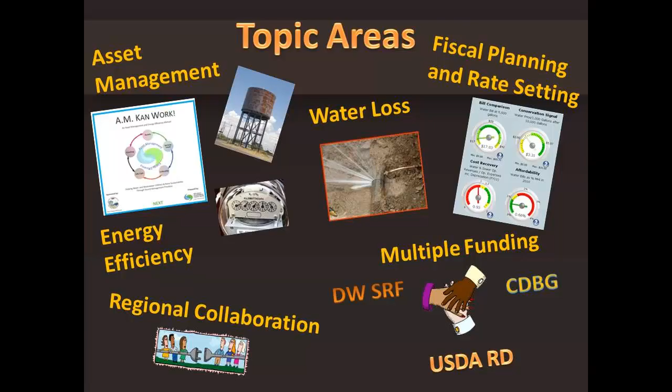Today's webinar is part of the Strategic Water Loss Reduction series of webinars. We had 3 in this series, and the first webinar was focused on understanding the problem. The second webinar focused on strategies to address real water losses, and this third webinar will focus on strategically applying water loss reduction strategies. Essentially, we will be talking about how you make decisions regarding which strategies to apply and how to apply them. Each webinar was designed to be a standalone webinar, and if you missed any of them and you wish to listen to one you missed, you can access the previous webinars online.

You can access these at efcnetwork.org. You can also access other webinars besides just the water loss ones. We've got all the other webinars archived as well, and you can access any of those on our website and listen to any of the other topics you would like to listen to.

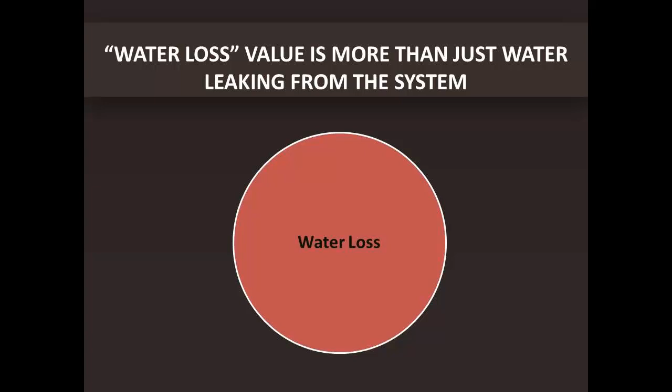So with that, we're going to start with a quick review. This equation probably looks familiar to those of you who have done any water loss reduction in the past, and you'll see an equation that says water produced minus water sold equals water loss. But we need to remember that water loss in that equation is more than just water that's leaking from the system. It's really all of these things that you see on screen.

Anything from water that you use within your town that's authorized but unbilled, to illegal water use, people who are stealing from your system, to water that the utility uses for flushing or other purposes, to the data handling and errors that may occur there, inaccurate meters, and then finally the lost water, which is what people have equated in the past. They've equated that number with just the water loss part, when it's really all 6 of these things.

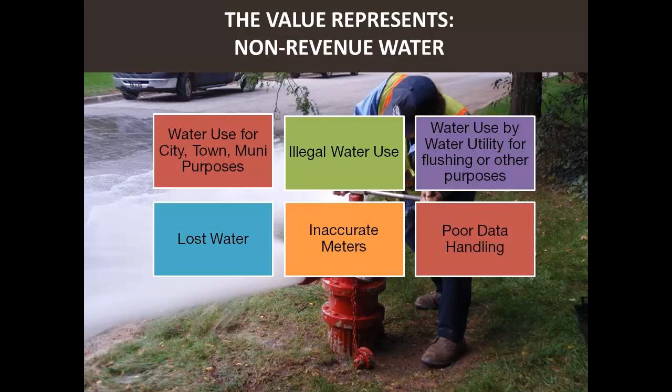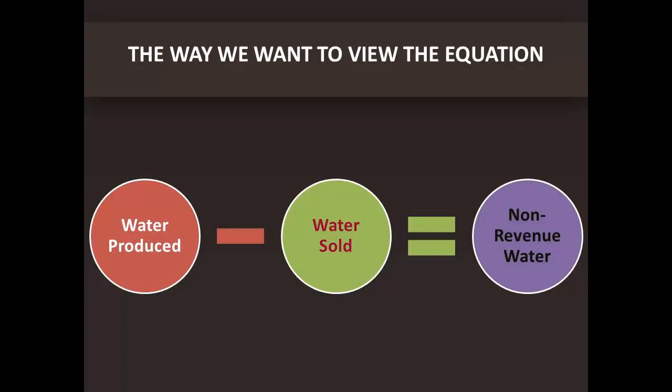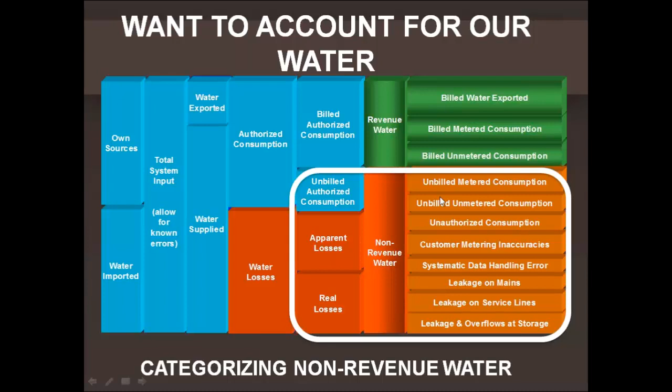So we really want to view the equation this way, where water produced minus water sold is non-revenue water. It's water that we do not get any money for. So the way we categorize that is we do a water balance or a water audit, and AWWA has probably one of the best ways of doing this, and you can go online and use their water audit software for free. What we're interested in with the non-revenue part is looking at what are the water quantities that occur in each of these categories.

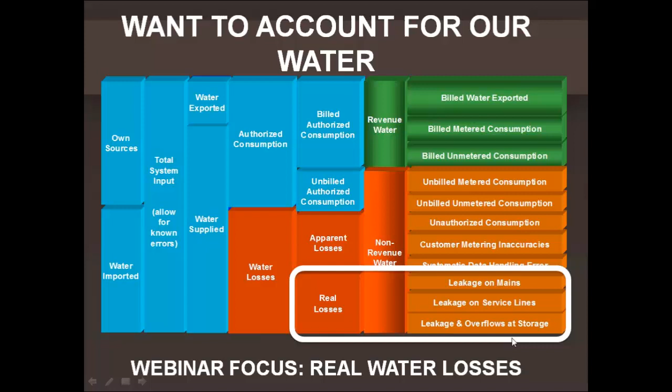And then specifically when we're dealing with real water loss, we're only dealing with this part of the balance. So you can see it's just one portion of the balance, and we want to see what our water loss is compared to the other categories. So before we start, we like to do a water balance and figure out what is non-revenue and what is water loss from our system.

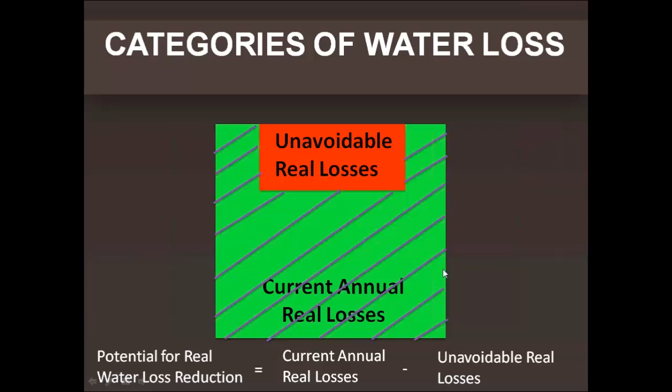Then there's another part of our water loss to think about, and that's what is economic for us to do—this is a different level. We know we have the potential to reduce all of this green area, the difference between green and red, but it may not be economical to go any further than this yellow boundary.

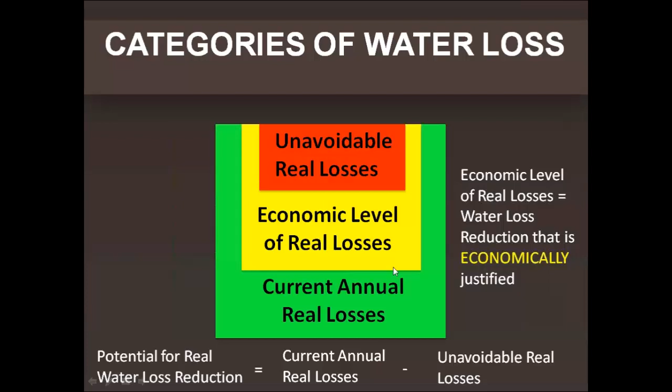What's economic is very system specific. You might have a system where it costs a lot of money to produce the water—maybe expensive treatment, or the resource is very scarce, so the cost to produce water is quite high. Perhaps that system doesn't have pipe buried very deep, or it's even on dirt streets, so it doesn't cost much to implement the strategies. In that case, the economic level of real losses may be quite high, maybe close to the current annual real losses. So in this system, it would be economic to address quite a bit of their losses.

Another system may have very inexpensive water—maybe they don't have to do much treatment, or maybe they have very little equipment, so it's expensive to go employ water loss reduction strategies. In that case, the economic level may not be that different from the unavoidable real losses.

So it's important to keep in mind that some of our losses, at a given pressure, are just not going to be removed, and there's a difference between all the water that potentially could be saved and the water that we feel is economic to reduce.

We can also add in non-economic factors. If we really have a scarce resource, we might want to go way beyond what's economical for us to do, but we just need to recognize that we're choosing to go beyond that level for other reasons.

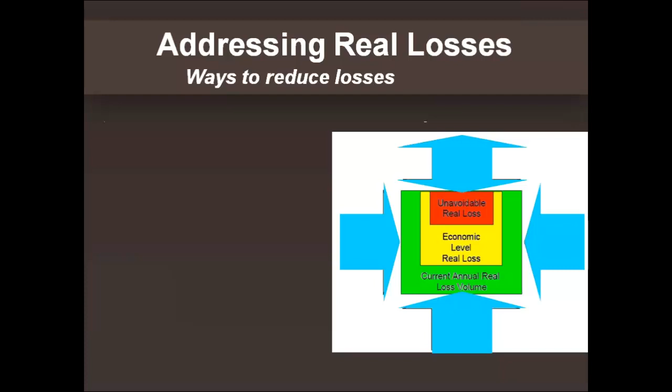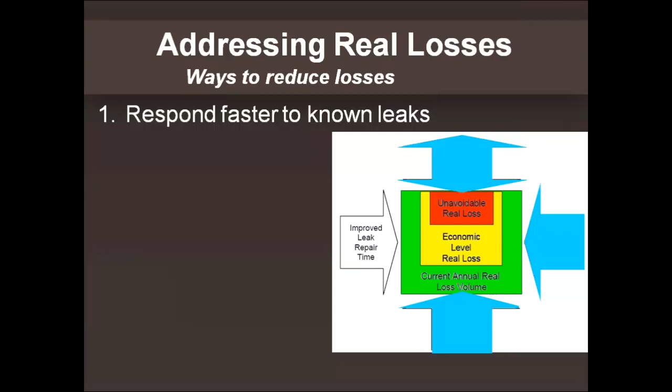When we go about addressing real losses, there are four major strategies we can employ, which we also talked about in webinar 2. One way is to respond faster to known leaks—a leak that's been found, either through leak detection or because it's visibly leaking on the ground. Getting to the leak faster saves money, time, and water by getting it repaired right away. Another strategy is asset management, which we'll explain. A third strategy is pressure management, or reducing pressure. And our fourth strategy is finding hidden leaks—proactively looking for leaks that are not visible to us.

You'll notice there are three arrows pointing in towards the green box. That signifies that any of those techniques can reduce the size of this green box. The pressure management arrow goes both directions, because pressure is the one area that can go either way—if you reduce pressure, you reduce your losses, but if you increase pressure, that will increase your losses. So pressure actually has both effects on the system.

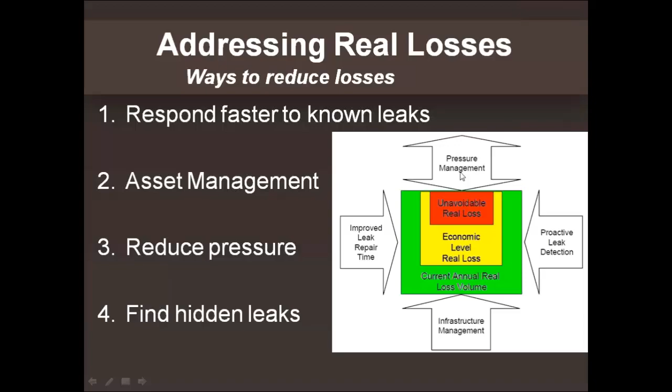Now we need to strategically deploy these four approaches, and we need to strategically decide which of the four to do, and then within each of the four we need to decide how to strategically do them. So we really want to think long and hard about what it is we're trying to accomplish and how we're going to do it.

We want to make sure that whatever approach we use matches the specific issues of the system. This goes back to the AWWA water audit or whatever audit process you use. You want to make sure that if you're taking on a particular water loss strategy, it actually matches the issues you're having in your system. If all the real water loss is related to overflows at a storage tank, then developing a program focused on hidden leaks isn't going to address it—you need to address the storage tank. Or if there are more losses related to inaccurate meters than real water losses, that's also going to be a problem.

You also want to make sure that it matches the capability and equipment resources of the system. If you don't have the equipment to look for leaks, that can be difficult. If you don't have the equipment to repair leaks, that can be a real problem. You want to make sure the quantity of funding available for water loss reduction is known, since that's going to impact what can be done. You want to know that amount before you start picking strategies, or if it's flexible, know what you need to show to justify more money for your program.

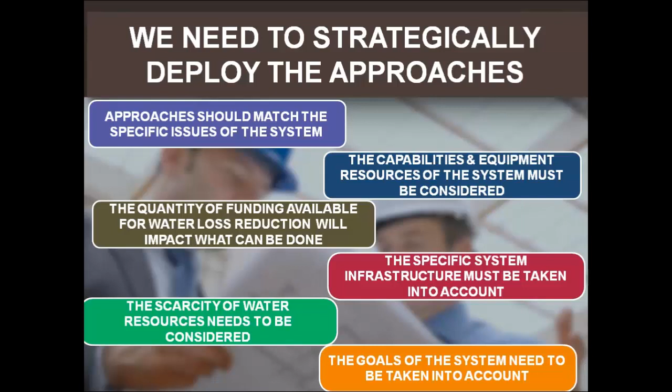You also have to take your specific infrastructure into account, so you know what technologies and techniques will match the type of infrastructure you have. You need to think about the scarcity of your water resources—if you have a very scarce resource, you may want to go much further in water loss reduction than if your resource is prevalent and you don't really have a problem with it. And finally, the goals of the system need to be taken into account, so your strategies match what you're trying to achieve. We'll talk a little later about goals and goal setting.

Something you want to do when you first start the process is gather data to assess the nature of your problem. We want the results of our water audit so we can tell what portion of that non-revenue water is related to real water leaving the system. We also want to think about how many breaks we repair each year—where are those breaks occurring, and what type of breaks are they? Are they breaks from degradation?

Are they breaks from poor construction techniques or poor materials that were originally put in? Are they breaks related to a construction contractor hitting the pipe, which is very different from a break caused by corrosion or something else? You want to think about what kind of breaks you have, and then what pipe type and size they're on. Is it PVC pipe that's 8 inches? Is it cast iron pipe that's 6 inches? Is it steel pipe that's 4 or 6 inches? What is it that's causing your problem?

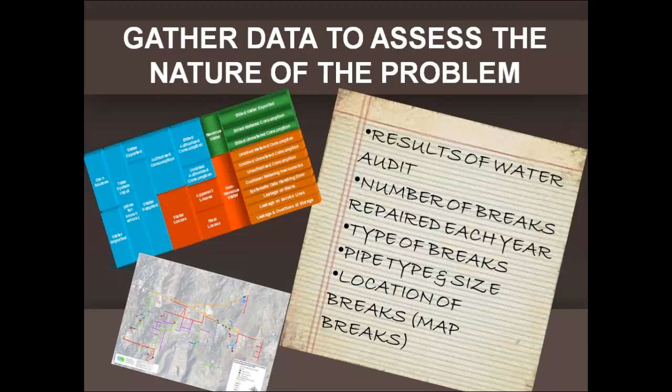Oftentimes you'll see a particular size or type that's causing the problem, or a particular location. If you map the location of breaks, similar to the map at the bottom of the screen here, you can start to get a handle on what's actually happening in your system and look at whether there's a certain area of the system having a problem.

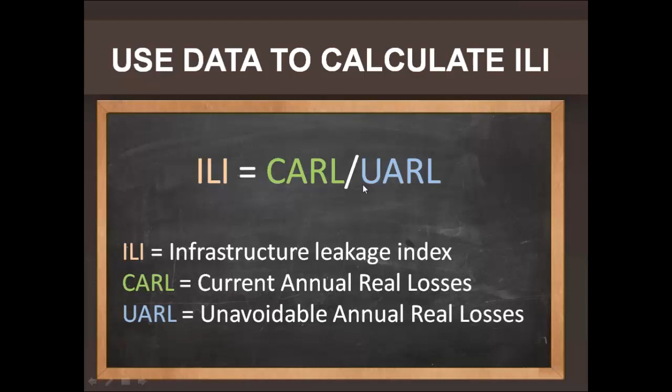Another thing you can do is a calculation, and this would be done for you if you use the AWWA water audit method. What you do is divide the current annual real losses by the unavoidable real losses to find out how leaky your system is.

Depending on the number you get, if you get a number of 1, it means all of your losses are background losses, and the only way to address that is by reducing pressure. None of the other methods will really get at that particular type of water loss. So in this case, you may not be able to do much of anything if your levels are that low, other than a pressure reduction strategy.

If your ILI is 2 to 4, there are potentials for improvements, and you have to think about which methods or method will be the most cost-effective way to do reductions.

If you get up to 4 to 8, you have very poor leakage control, and water loss reduction is going to be very cost-effective and necessary because you have quite a bit of leakage in your system.

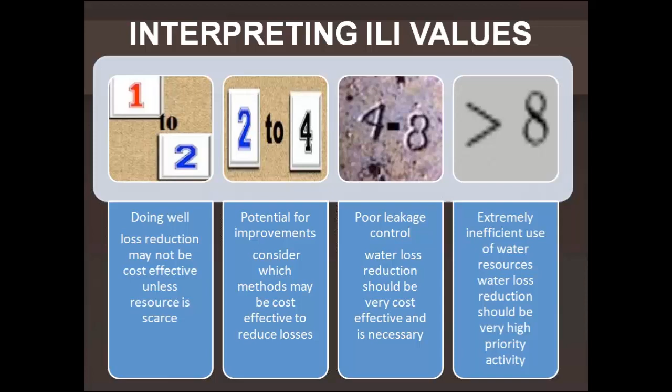If you get over 8 with your ILI, that's an extremely inefficient use of your water resources, and this means water loss reduction should be a very high priority activity because you're having a lot of issues with leaks from your system. So again, it helps you get some idea of how bad things are at your system and what you might want to do about it.

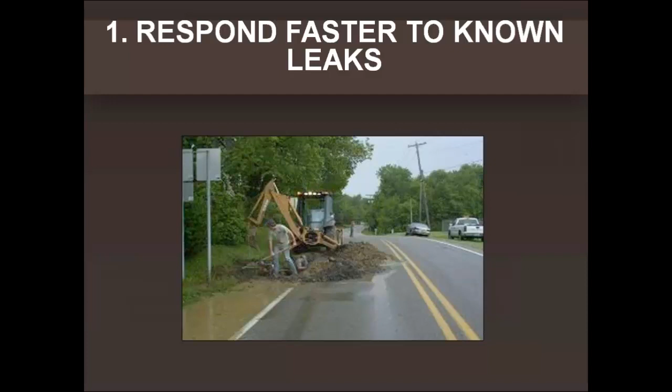Now we're going to go through each of the 4 different types of strategies and talk a little bit about what goes into employing any of these strategies.

So if you're going to try to fix your breaks faster, one of the things you need to do is collect some data to help make your case that it could be cost-effective to fix breaks sooner.

Think about what it would take to fix breaks twice as fast as we do now. If it takes a day to get out and respond, what if we did it in half a day? Or if it takes 2 or 3 days, what if we did it in 1 day? So pick a number on how much faster you would like to respond to breaks and fix them, or if twice as fast doesn't work, how about a third as fast?

If you watched webinar 2, you'll recall that when we looked at cutting the time of a leak in half, you could save quite a bit of water if you can do that. So if you're going to do this, you'll have to ask what resources you would require in order to fix breaks twice as fast.

Would I need additional personnel? Would I need additional equipment, like more backhoes, trucks, or shovels? Or what is it that I might need if I was going to try to fix breaks faster? Would I need additional spare parts? So you gather up all the things you think you would need in order to fix breaks faster, and then you start to prepare a cost-benefit analysis.

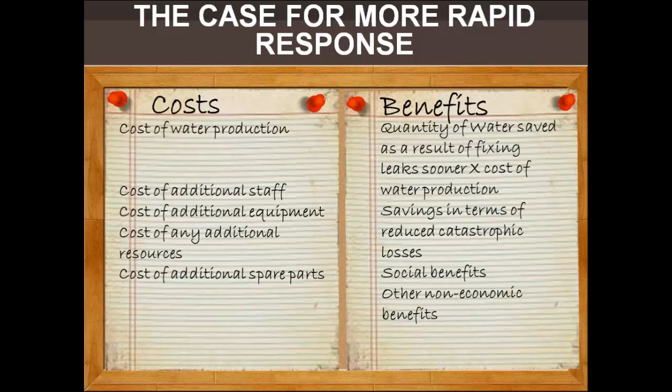What's the cost of water production, which actually shows up on the benefit side, which is why it's separated out? What does it cost you to produce a gallon of water, or 1,000 gallons of water? Then what are the costs of the extra things you would need? So you assess the staff, the equipment, the resources, etc. that you would need to fix breaks faster.

You need to add up the cost of all those things and then put that against the benefit. The biggest benefit to doing it faster is the quantity of water you're going to save as a result of fixing the leak sooner. So you take that amount of water and multiply it by the cost of water production on a per 1,000 gallon basis, or whatever you want to do there. Then you look at whether there would be any other savings, maybe from reducing catastrophic losses by getting out a bit sooner.

So waiting a long time means that in some cases you have sinkholes develop or major pipes collapse or a street caves in. If you're able to get out faster, you might prevent that kind of thing, so you could also factor in the benefit of that.

And then are there any social benefits to fixing the breaks sooner? Benefits to your customers, less inconvenience, that type of thing. That might be a non-economic benefit, and there may be other non-economic benefits you want to factor in there.

You can either turn those into economic benefits by saying every hour a customer is inconvenienced is so much money, or every hour less that they're inconvenienced, or you can leave them as non-economic benefits and just factor it in qualitatively.

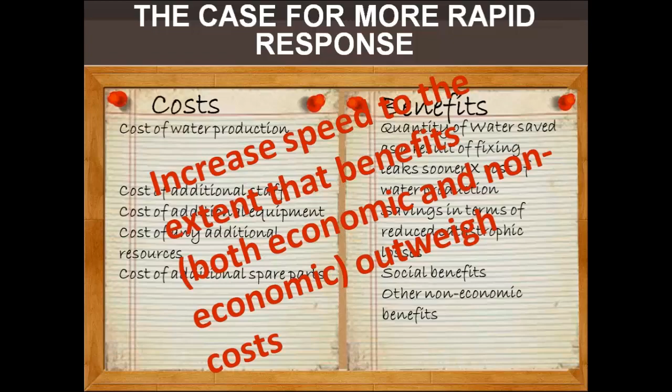Anytime it would cost you less to increase the response to known breaks than the benefits you'll achieve, it is economic for you to go forward and increase the speed. So you can make this case to your decision makers, your managers, and say, as long as it's economic for us to do so, we certainly want to do it.

If it's not economic right off the bat, we might want to put our non-economic benefits in there and see if that might outweigh the cost of implementing a faster response time. So this is one way you can decide whether it would be worth your while to increase the speed at which you respond to known breaks.

The second strategy is asset management, and we'll focus on how asset management applies to the water loss situation here. We have quite a few webinars on asset management on our website, so if you want to learn more general information about water loss and asset management, please see our website, efcnetwork.org, and watch some of those webinars.

There's a series of 5 that walk you through the process.

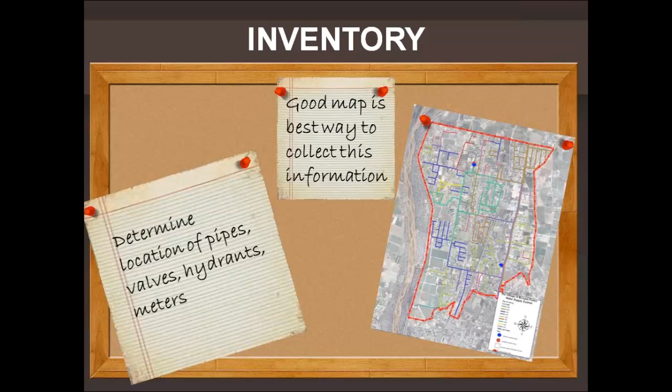But when it's related to water loss, what we start with is an inventory. Where are the pipes, the valves, the hydrants, the meters that make up our system? And the best way to collect that information is in some kind of mapping. It doesn't need to be a GIS map like the one shown on the screen. It could be anything - a hand-drawn map, a free online base map from Google Earth or MapQuest where you draw your lines on there. Just some way to collect that information into a map is the best way to inventory.

Then the second thing you want to do is establish what your water loss goals are. What is it that you're trying to achieve? Do you have a specific amount of water you want the loss to be per customer or per mile of main? You may have several different goals, or one or two goals, and you want to make sure you know the target level for each goal, because this will really help you later determine what strategies you want to employ.

Because if you know you have to get below a certain level of leakage, perhaps it isn't just an economic level - maybe you're going below that. You're going to have to employ a couple of different strategies to get there.

The next thing you want to do is evaluate the criticality of your pipes and related assets like your valves, hydrants, and meters. What we do to evaluate criticality is ask: what is the probability of failure of that asset? How likely is it that asset will fail?

And then what is the consequence of that failure? If you think about your piping network, you'll have pipes that are maybe very small diameter in a residential neighborhood. Perhaps they've shown a history of leaks, so there might be a high probability of failure, but that particular pipe would probably have a very low consequence - likely to fail but wouldn't cause a bad problem.

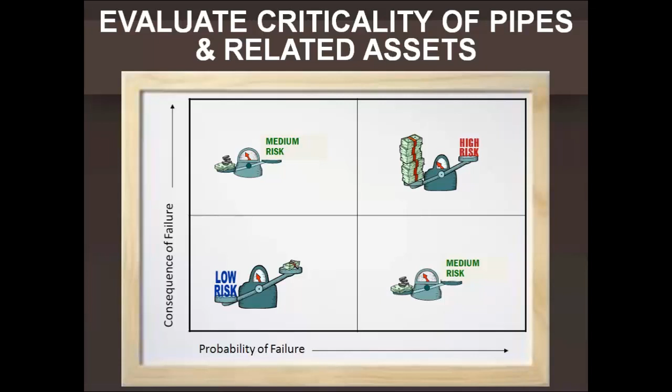When you know which box different pipes fall in, this helps you decide strategies in terms of both pipe repair and replacement, and also helps you decide which pipe to look for hidden leaks and that kind of thing. So this is a nice way to get a handle on what's going on in your system.

Knowing the criticality of the pipe helps us decide which pipe we're going to repair versus replace. When pipes are breaking in our system, we don't necessarily have to replace all of them. We can live with a higher level of breakage in a low criticality pipe than a higher criticality pipe. The ones that are higher criticality, meaning high risk and high consequence, we would probably err on the side of replacement or rehabilitation. The pipe that's lower criticality, we would probably do more repairs.

We can separate our pipe out because repair is going to be cheaper in most cases than replacement. So we can decide to spend more on the repair side when it's not a high consequence, and more on replacement when it is. There's also rehab strategies, which in pipelines would be things like lining a piece of pipe so that it stays in place, but we've rehabilitated it by giving it a nice clean liner that allows the pipe to continue to function for us.

And then finally, we need a funding strategy. What funding will we need for our pipe replacement? What level of funding would make sense for that program, whatever we're trying to do for our pipes, to cover the repairs, the rehabilitation, and replacement that we're trying to accomplish?

Could we phase our projects to fit within our budget? Maybe you want to do a whole bunch of pipeline in one year, but you just can't get the funding. If we were able to phase that over time, that might help us fit within the available funding. And then finally, is there public support for any additional funding? Sometimes if your system has a lot of breaks, there may be public support to have extra funding specifically targeting infrastructure replacement.

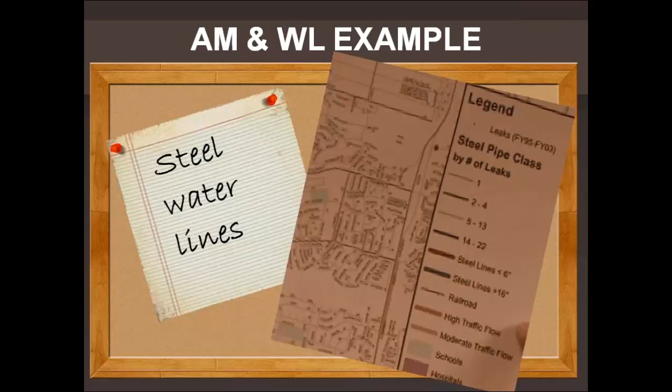A quick example of how this works in practice is the Albuquerque-Bernalillo County Water Utility Authority. They had an issue with steel pipes. We looked at data for a 15-year period and found that about 5% of the system was steel pipelines, but it was causing about 50% of the breaks on average. So from year to year, the breaks would be about half the time in steel pipelines, even though it was only 5% of the pipe they had in their system. Clearly they had a huge problem with steel pipe.

The natural response might be to just take all the steel pipe out of the ground right now. Unfortunately, it was going to be somewhere on the order of about $40 million to take all the steel pipe out of the ground at once, and that just wasn't within the level of expenditure they had. They were looking at maybe $2 to $3 million a year they could spend on small diameter steel pipe. You have to remember that when you're running a water or wastewater system, there are a lot of competing priorities. If I spend money on pipe, I can't spend it on wells or treatment or pump stations or anything else. So that was the main issue—you're always competing one thing against the other.

So the budget they had was going to be $2 to $3 million, and they had to have as big an impact as they could with that amount of money. You couldn't just start at one side of the system and work across until you've replaced all the steel, because the criticality of that steel pipeline was quite different from one piece to another. So they went through a whole analysis to determine the most risky pieces of steel pipe and address that pipe first, and they were able to have a really big impact.

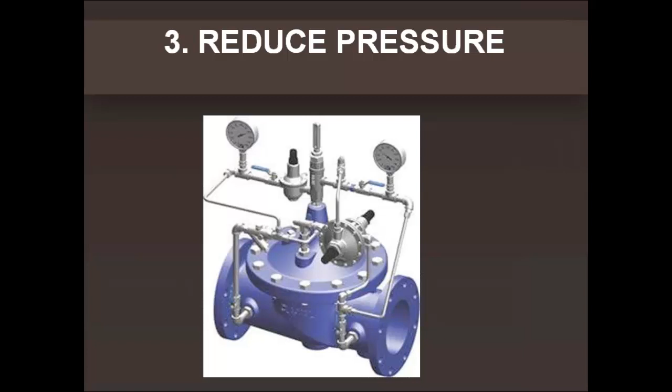Our third strategy is reducing pressure. We have two things we have to think about with reducing pressure. The first one is, do I have a problem that needs to be addressed? In other words, how bad is the background leakage in your system? And the second, is there anything I can do about it? So you first need to know if there is a problem that needs to be addressed, and then you need to know if you can actually fix it.

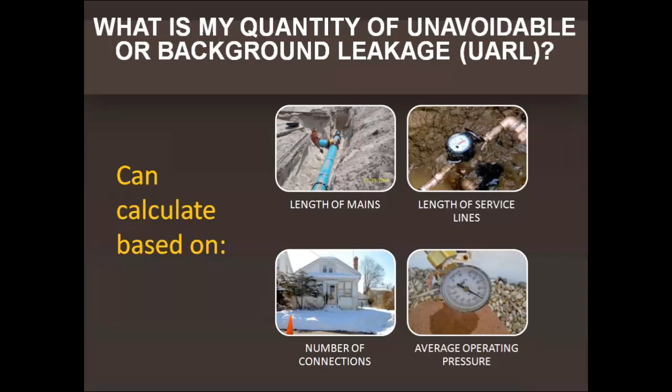You can calculate to some extent what your background leakage is, or your unavoidable losses. What you need to know is the length of your mains, the length of your service lines, the number of connections that you have, and the average operating pressure that you work at. There are several online resources that will walk you through this, and there are even some spreadsheets you can use to help calculate this.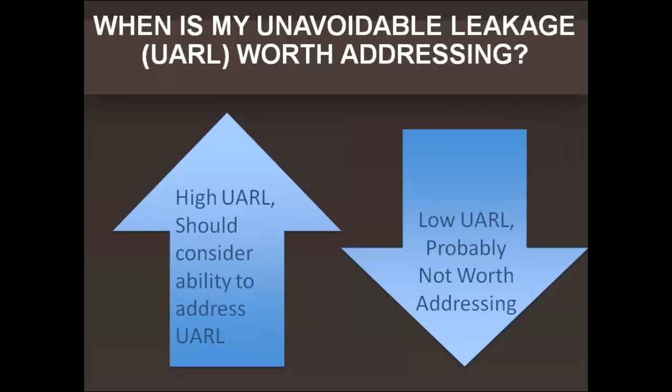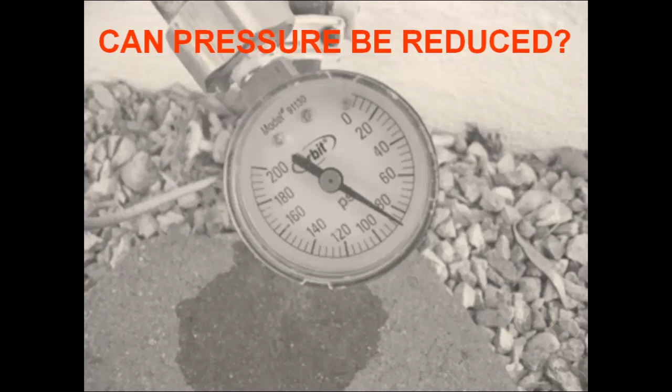So if you calculate your unavoidable real losses and they turn out to be pretty high, you may want to address that problem through pressure management. If they turn out to be pretty low, it may not be worth it for you to go through the time and expense to address it. It may be better for you to work on different real loss strategies if this is the case.

So can pressure be reduced is the second part. If we know there's an issue, suppose you have a high unavoidable real loss, the question is, can you operate the system at a different pressure to try to reduce it? Because this is really the only strategy you have, besides replacing all the pipe in your system. This is really the big strategy you have: pressure reduction.

So what you want to know is, what is your current operating pressure? What pressure do you actually operate right now? And then what pressure is required by your state regulations? Most states do have a regulatory requirement to meet, say, 20, 25, or 30 psi. They're trying to protect the public, because you don't want to operate your pipes at too low of a pressure, or you might start sucking things into the pipe, which we don't want. We want water to be pressurized so that nothing comes in, it just flows out.

And then we want to know, what pressure would our customers accept? For example, maybe the pressure the regulations require is 30 psi, the current operating pressure is 80 psi, and our customers would be okay at 50 psi. That gives you some room to come down from 80 to 50, but you wouldn't necessarily want to go from 50 to 30 unless you had a big public education campaign, because you want to make sure you stay within the range that your customers will be okay with.

And then you have to say, do I have a means to control the pressure? How would I do that? Would it take a major redesign of my system? Would I have to have brand new pumps? Or do I have zones that I can control, pressure reducing valves, or some other means that I could control the pressure fairly easily? Or do I have the ability to control pressure at night?

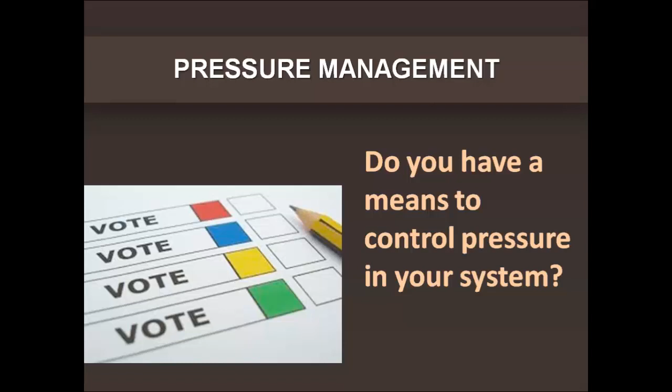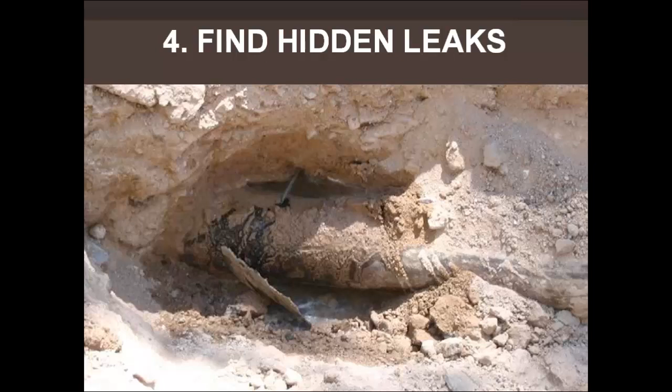Okay, if we can go back to the slideshow - the last part is finding hidden leaks, where we're proactively going out and looking for leaks underground in our pipes that we're not able to see because they haven't surfaced. Some people ask, are there really hidden leaks, or will everything eventually surface? Everything is relative - maybe in 10 or 15 years the pipe will be so catastrophically damaged, or the soil eroded away, that something will happen for you to find it. But do you really want to wait that long?

There are quite a few hidden leaks that will not surface for any length of time. We studied a few small leaks over about 1.5 years and never saw any visible signs of them. So there can be hidden leaks for all kinds of reasons that will be very difficult for you to find unless you proactively go and look for them.

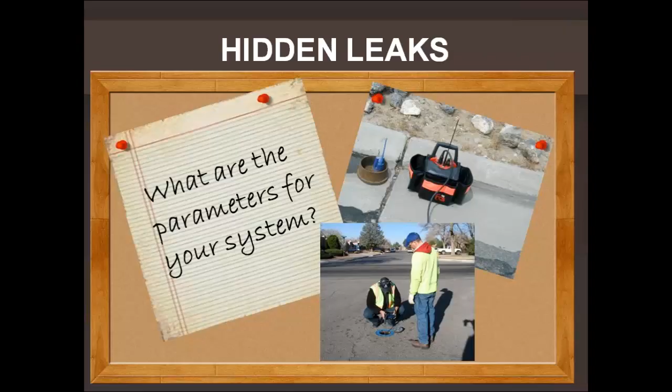One of the things you need to know before proactively looking for leaks is what the parameters of your system are. What do you actually have within your system? What kind of pipe and appurtenances does it have? How much pipe is in the system - how many miles, what kind, what age, what condition, what type and size? And then, how many contact points do you have and how far apart are they?

When we talk about contact points, we mean things like hydrants, meters, and valves - places attached to the main line that we can listen to, because otherwise we can't put a device directly on the pipe to listen for noise. So we need something else, again hydrants, meters, and valves, to listen for leak noise, which transmits down the pipe to the meter, valve, or hydrant so we can hear it.

The closer the contact points are, the more likely you are to hear your leak noises. If you have long distances between contact points, it can be very difficult to hear a noise that's maybe halfway between hydrants that are spread really far apart.

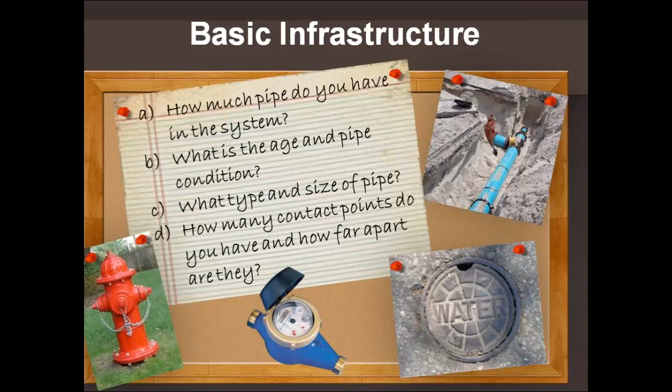Thinking about the size and type of pipe - if you have very large diameter pipe, some strategies will not work. If you have plastic pipe, the noise doesn't carry as well, so contact points need to be closer for you to hear it. With long runs of plastic pipe and very few contact points, proactive leak detection becomes a lot more difficult. That's why it's really important to understand your system's parameters before investing in technologies and approaches, because if your setup isn't conducive to it, you'll spend a lot of money without achieving much.

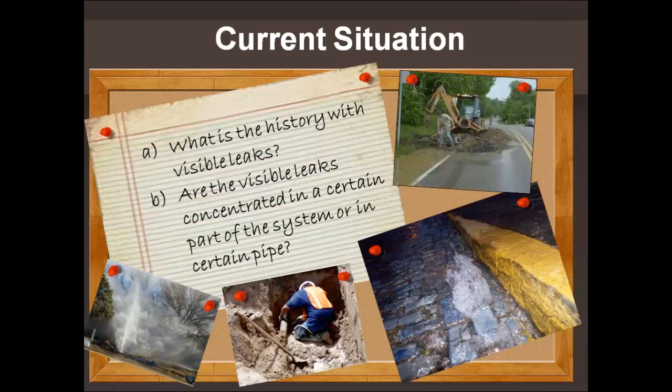You also want to think about your current situation - what's your history with visible leaks, the ones that actually surface? Do you tend to have leaks that bubble up through the ground, or geyser-type leaks? How many leaks do you have in your system, and are they concentrated in any certain part of the system or certain pipe?

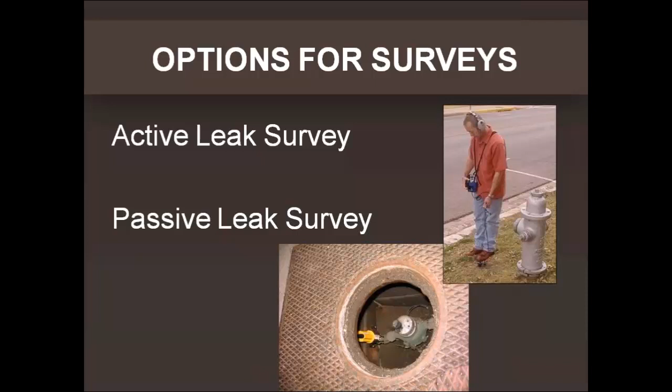Sometimes communities develop in waves. Maybe a big chunk of your system was put in during the 30s, then another chunk in the 50s. So you'll see that in parts of your town built a long time ago, leaks may be concentrated in that particular area, or concentrated in a particular pipe type, like the example where one pipe type wasn't working well for their system. Think about your visible leak history, because that's going to give you information to go forward looking at hidden leaks. It'll tell you a lot about them.

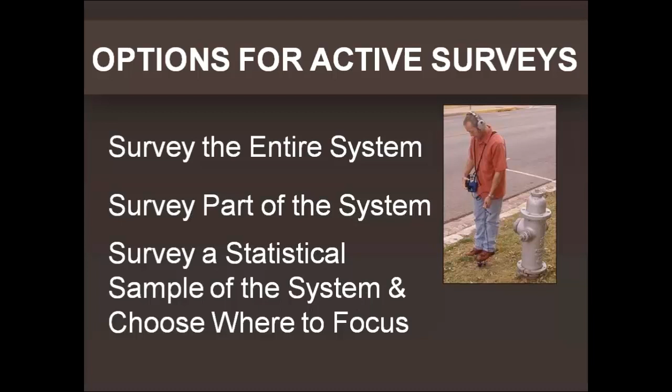Your options for looking proactively are to do an active leak survey or a passive leak survey. In an active leak survey, a physical person walks along the pipe listening at contact points as they go, listening to hydrants, valves, and meters as they walk along the pipeline.

You have a choice of surveying the entire system, where the person walks the entire length of your system, all of your pipe. You can survey part of your system, choosing to survey one particular section, or you can do a statistical sample of the entire system and let that choose where you focus additional resources.

Considerations in surveying the entire system include the cost, how much time the survey would take, and how much pipe you have. If you're a small system with very long runs of pipe, which some systems have because they don't have a high density of housing, even though they're relatively small in terms of connections or customers, the survey will be much more expensive because there's more pipe to walk along. So think about all those cost elements.

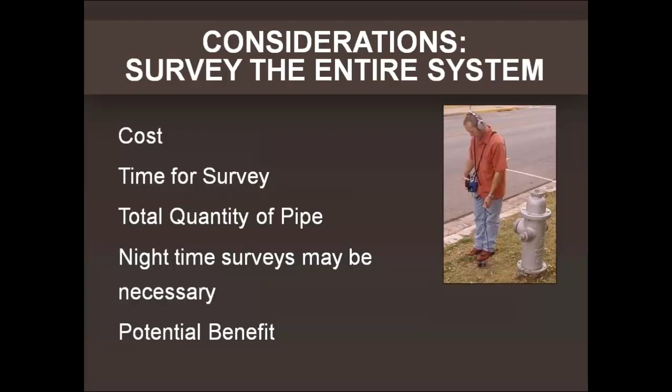And then, will you have to do surveys at night? If you have busy roads, you may have to wait until nighttime, which might impact cost. Weigh those costs against the potential benefit. What would you gain by surveying the entire system instead of just a portion? If there's a real reason to have information about the whole system, you might want to do this kind of survey. But if you're not sure you need information from the entire system, this might be an expensive way to go.

Another option is to just survey part of the system. Can you achieve most of your benefit by focusing on the worst part? You skip your newer, better pipe, skip areas not conducive to surveys like long runs of plastic pipe, and you have the potential for huge cost savings.

For example, if you were in Albuquerque and focused on the older sections of town where the old steel pipe was, you'd find most of your leaks rather than having to survey all the newer plastic pipes. Look at your system and ask: where are my newer areas, my better performing pipe? It's not always related to age, though—sometimes old cast iron pipe does quite well because it was so thick.

So really try to focus on where you're likely to have breaks, and again use that visible leak data to tell you where you're likely to have a hidden leak problem. Focus your survey on those places, because maybe you'll find 60, 70, 80% of your leaks by looking at just 20 or 30% of your system—lots of benefit at a much reduced cost.

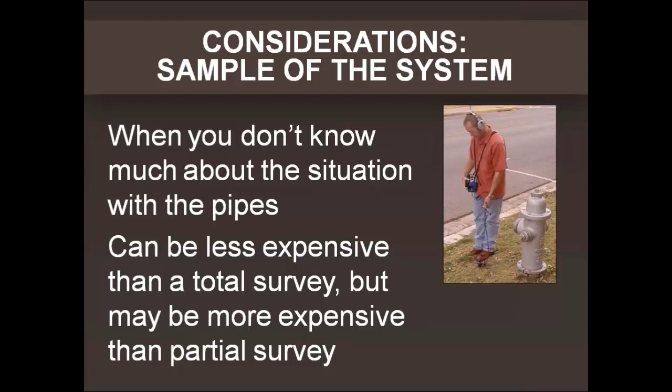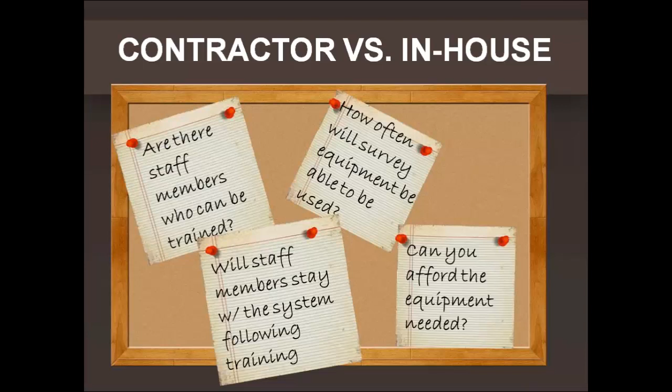You can also do a statistical sample of your system when you don't know much about your pipes or where the problems will be. It'll be less expensive than a total survey, but may be more expensive than a partial survey, since you'll sample different pipe types in different areas to determine problem areas, then go back and do a targeted survey on those pieces of pipe that are the biggest problem. You can either use a contractor to do this or do it in-house.

Either way will work, but you have to ask yourself: do you have staff members who could be trained to do leak detection, and how often would they actually be doing this work? If it's only once every couple of years, they won't remember what they learned, or a person may leave before they get to do it again. So you'll spend money training somebody up, and they won't ever use the technology enough to get really proficient with it.

Can you afford to buy all the equipment needed for an in-house survey? You can weigh that against the cost of a contractor. A contractor on a per-mile basis would be more expensive, but that's offset by the cost of training your staff and buying equipment. So it depends on how often you want to do it, but if only once every couple of years or even once a year, you probably don't want to invest in your own staff. You'd probably use a contractor.

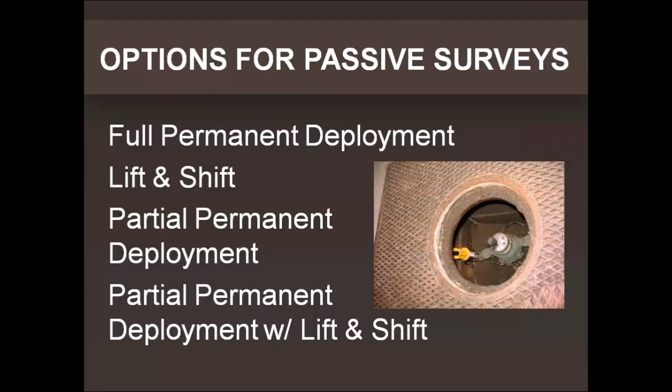For passive surveys, you can do full permanent deployment, lift and shift, partial permanent, or partial permanent with lift and shift. In this case, we're talking about adding a device to your system, permanently attaching it - not meaning you can't take it off, but that you're going to leave it there for an extended period, like months to years.

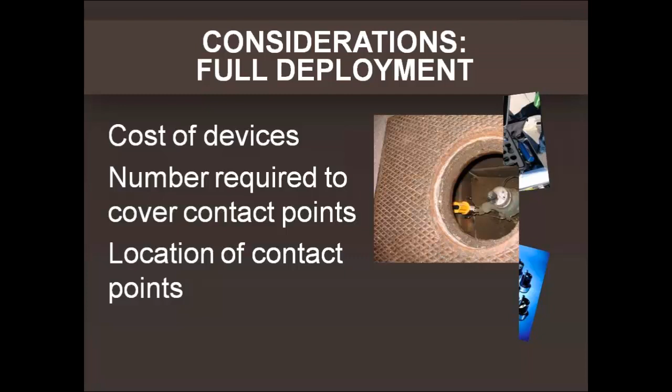You'll have a device on meters or valves. You typically wouldn't put this kind on a hydrant because somebody could walk away with it. If you were going to do this, you'd have to have quite a few devices, connected to your contact points, and it would be very expensive to buy all these devices to cover your whole system. It depends on the actual device you use and what technology it deploys, but it could be quite expensive if you have a lot of valves to put them on.

Another option is to buy less equipment and do it in a lift and shift mode, where you take a few devices, deploy them for a short period - maybe a week or two weeks - on the valves and meters, let them listen for leak noises, and then go around and check out those noises to see if there are any leaks. After you've done that area, you move those devices to another area, and keep moving them throughout the whole system. It's a lot cheaper to obtain these devices because you need a lot fewer, but there is a time element required because you have to lift and shift them.

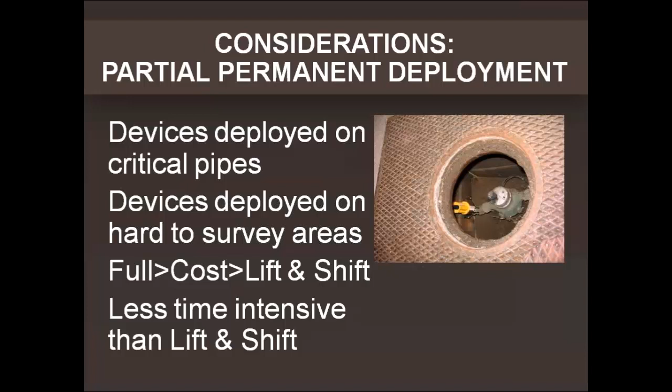You can also do a partial permanent deployment. We talked about the criticality of the pipes - you might want to deploy devices on just your critical pipes, or pipes that are hard to survey because of traffic or other reasons. You could permanently put devices there so they're not on the entire system, but strategically placed on portions of it. This would cost less than a full deployment, but probably more than a lift and shift.

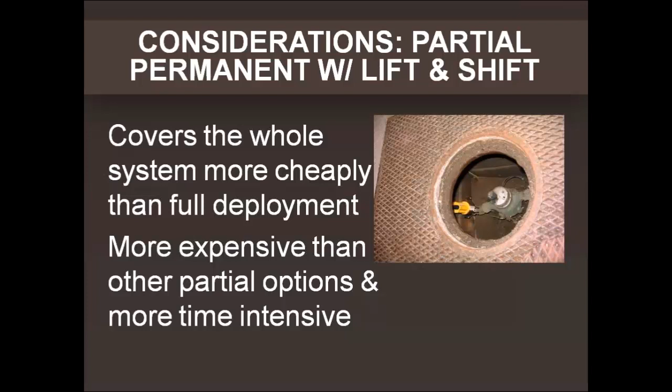You can do the two in combination, where you have some devices permanently deployed and another set that you lift and shift. This might be more expensive than the other partial options, but it could give you a lot of really good information and allow you to cover the whole system.

So when we think of active versus passive, using a person versus devices, you have to weigh the cost of devices for deployment out in the system versus your staff to use. How do those costs compare? Do you need nighttime surveys - passive devices are much better for nighttime surveys than people? How many contact points? What quantity of water loss do you actually have? How often do you want to survey the system? You really need to think about all of these issues when you decide whether you want to deploy devices or people.

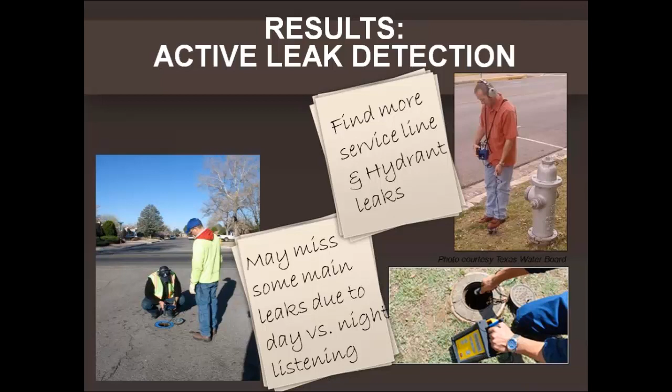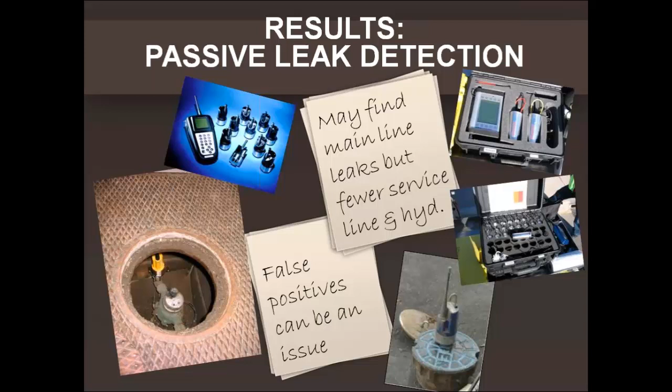Active leak detection oftentimes can find more service and hydrant leaks, but may miss some mainline leaks due to the fact that if they're out during the day instead of night, it might be hard to hear. Passive can find a lot of mainline leaks, but sometimes misses the service and hydrant leaks, depending on where you deploy them, whether they're on valves or meters.

False positives can be a real issue because remember, the devices are listening for noise. They're not always able to tell whether it's actually a leak or not. So sometimes they go into alarm mode when it's not a leak, and we call those false positives, and you have to actually go out and check each one of those to see if there's a leak.

That can get very time consuming. We did some head-to-head work where we went through some same areas, and we did active leak detection, passive with devices that are typically permanently deployed, and then we also used passive where they were lifted and shifted.

I have to say that all three gave fairly different results. They all three found leaks, but they seemed to find different leaks. We found more hydrant and service leaks with the active. We found more mainline leaks with this particular version of passive. And then we found both hydrant, service, and mainline leaks with this device, but these two options had a fair number of false positives, much more so than the active leak detection.

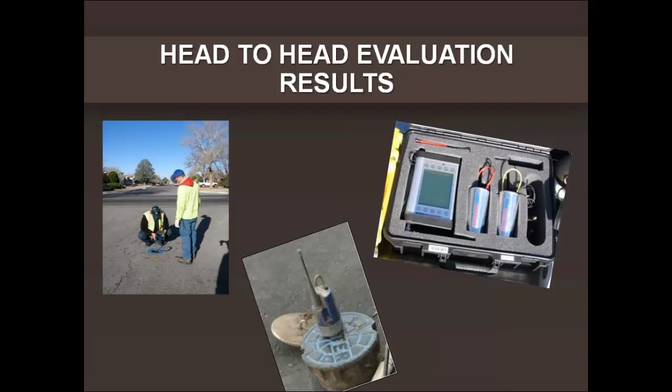So there really wasn't a clear-cut case of one finding so many more than the others. It was just kind of what they were finding and what process it took to find them. So I guess that's a way of saying it's really very system-specific what you want to do. There's not really a clear-cut case that this is the best way to go.

So the bottom line on looking proactively for leaks: only look for what you can actually fix, because remember, finding a leak is not going to save you water, fixing the leak will. So make sure you keep looking for leaks matching what you can actually fix.

Match the technology or technique to your system specifics. If you have long runs of plastic pipe with very few contact points, buying a lot of expensive technology to deploy on the valves is not going to help you much.

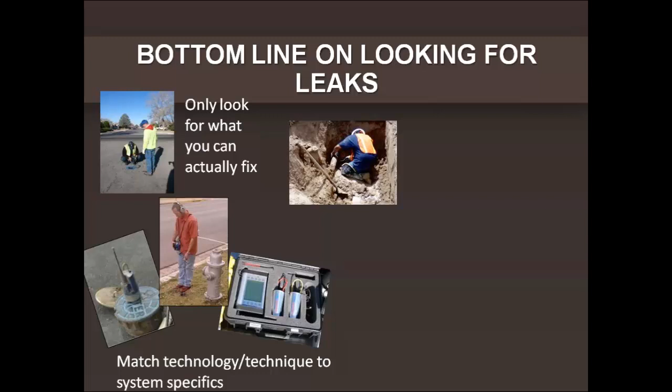Choose the activities that will meet the goals you've set for your system, and then finally match your activities to the budget. If you only have a few thousand dollars to spend, you've got to be very judicious about how you spend it. If you have more money, you can do more. If you have less money, you have to be really careful about how you deploy the leak detection techniques.

So another poll question for you: what type of leak detection have you tried? In this particular one, you can select all the answers that apply to your system. Active leak detection with your staff, active leak detection with a contractor, passive leak detection with full deployment, passive leak detection with lift and shift or partial deployment, or have not used leak detection at all. Just take a moment and click the ones that apply to your particular system.

We'll give it maybe about 10 more seconds.

So we have quite a few who have done kind of a mix of leak detection with their own staff and not used leak detection at all. And some have had a contractor. A few have actually used some passive leak detection. So we kind of have the range of things. And hopefully you've been able to have good results with your proactive leak detection.

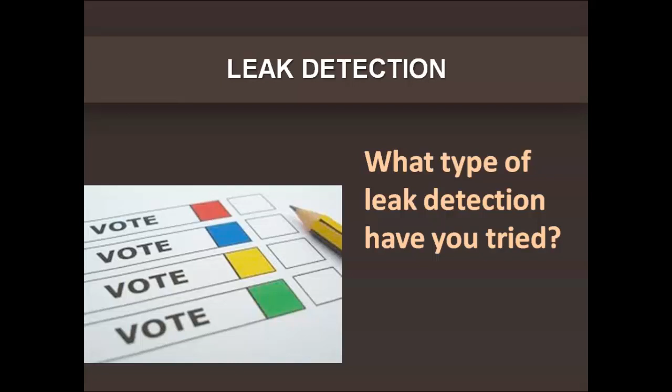Okay, if we can go back to the... so there are some difficulties with implementing a water loss reduction program, and by a program I mean strategically choosing between the four options, what you're going to do and how you're going to do it. There are some difficulties when you go to implement a program like that.

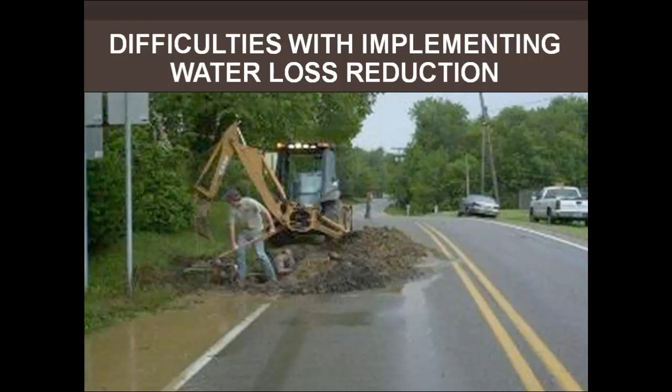One of the basic ones is it's much more interesting to design and build something than to fix underground pipes. So this program is not a sexy program. There's not a lot of ribbon cutting. So sometimes people kind of lose interest in the program because it's not visible, it's not in the forefront. It's extremely important, or it can be extremely important to a system, but it's not the kind of thing that's sort of front and center in people's minds.

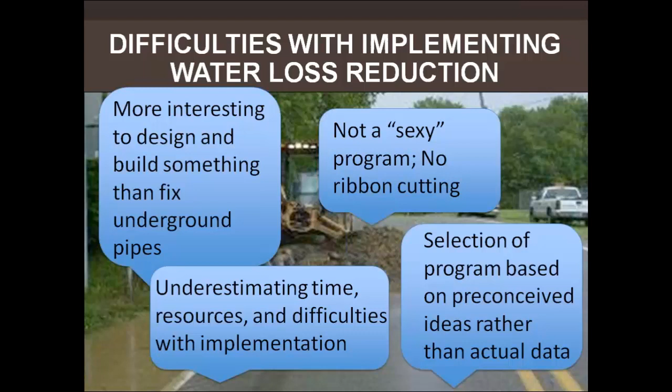So that can make implementation difficult. You don't want to select your program based on a preconceived notion about what's going on. You want to use the actual data from your audit or system records. You don't want to just assume that you know what the problem is. You want to really use the information you have to make the best decisions about what to do. You don't want to underestimate the time, resources, and difficulties of implementing, because it is a big process. It will take time to work through it.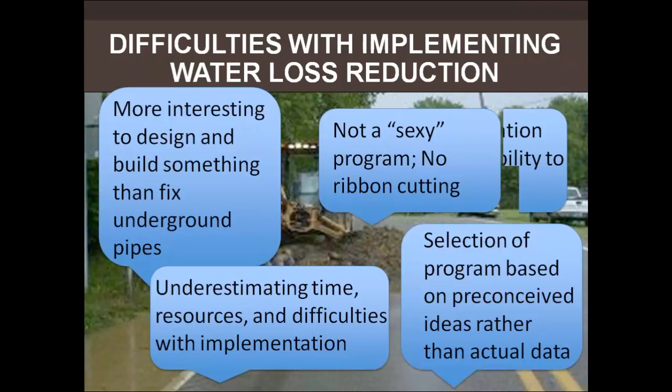You don't want to do a partial implementation, because then you can't meet your goals and get the work done. Finally, sometimes it fails because people fail to mobilize all the resources. You're going to need people, equipment, money, and data to do a program like this. If you don't put all the effort into it, it's not going to work for you. Keep in mind that it will take some time and effort to implement a program like this.

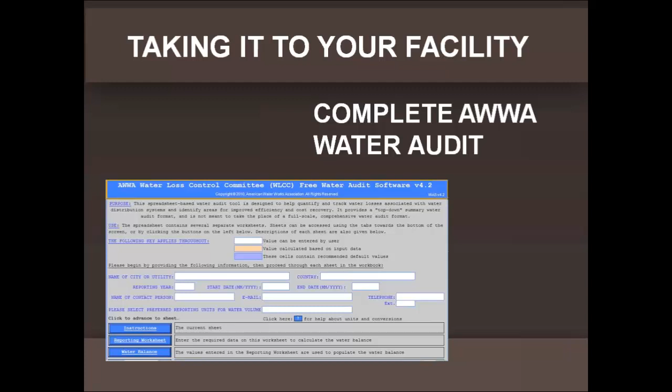So finishing up our webinar, just a few words about what you might do at your own facility. You might want to develop a team to help with this process, complete your AWWA water audit or some other water audit process, and determine how large of a problem you actually have with real water loss. Before you go down the path with any strategies, you really want to make sure this is a real issue for you or not.

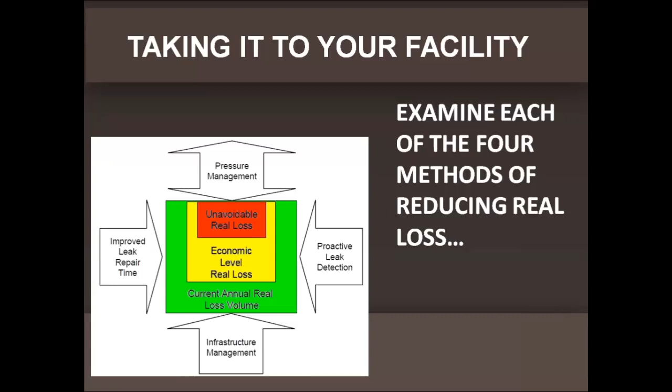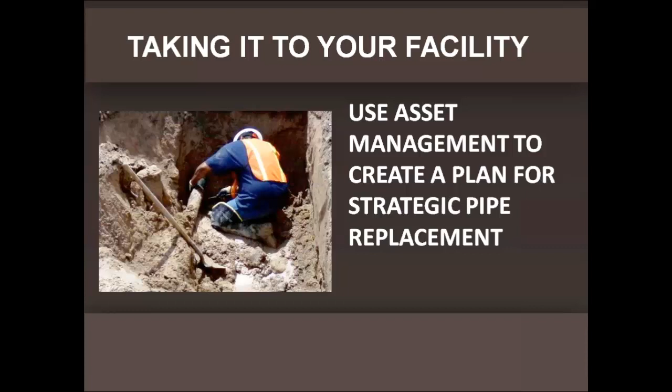Examine each of the 4 methods of reducing real loss and see if it makes sense for you to fix breaks more quickly, based on the cost-benefit ratio. Does that favor fixing breaks more quickly? Use asset management to create a plan for strategic pipe replacement, to save yourself money and get a big benefit from what you're doing.

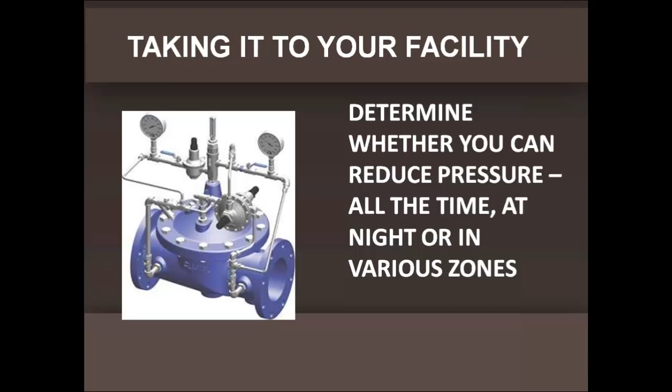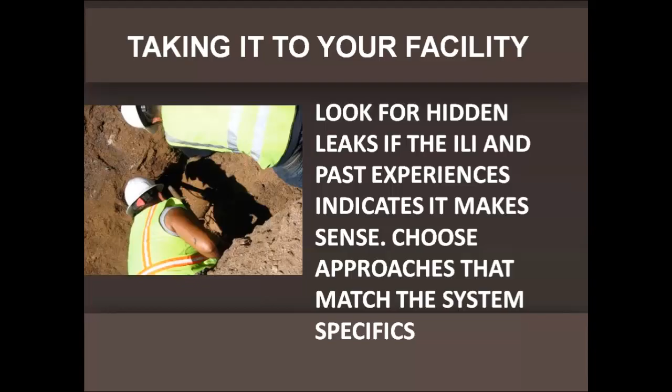Determine whether you can reduce pressure. Can you do that all the time, at night, in various zones? What are your possibilities of reducing pressure? Can that be done? Do you have room to reduce before you get into trouble with what your customers would want or regulatory requirements? And finally, look for hidden leaks, if the ILI—the infrastructure leakage index—and past experience make sense. You want to make sure that what you do matches the specifics of the system, because it's very system-specific whether you should use one approach or another. It really isn't a clear-cut case of across-the-board, this is what you should do.